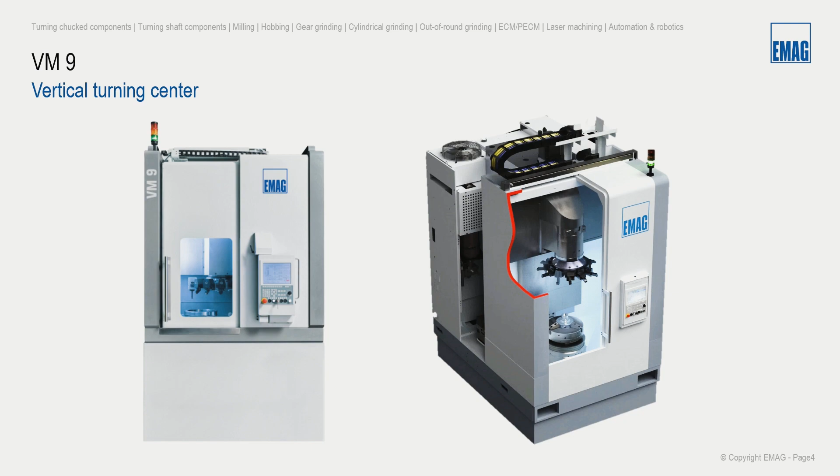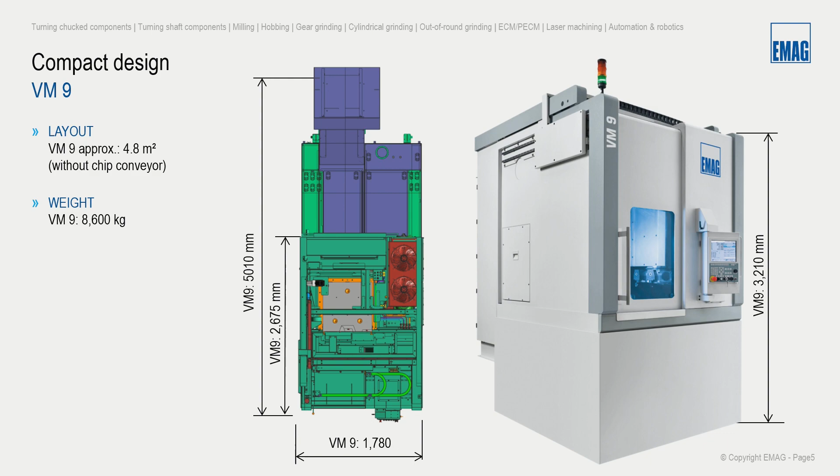The advantage of this machine is a very small footprint. As you can see, we have around 5 square meters of layout footprint, not very wide at 1.8 meters and a height of 3 meters. If you compare this with normal horizontal lathes, which you'd normally use for the production of bigger parts, you can see that we are reducing your floor space with this concept.

I think this is an advantage for all the VL, VT, and VM machines. They all have the same advantages.

Some words on the dimensions. The machine is focused on producing round components, or even more fragile components, up to 450 mm diameter and a component weight of maximum 300 kilograms. If you compare this to the numbers we are used to handling in our vertical VL machines, you can easily see that here we can deal with heavier and bigger-sized components. So this is also one of the reasons why we have this machine.

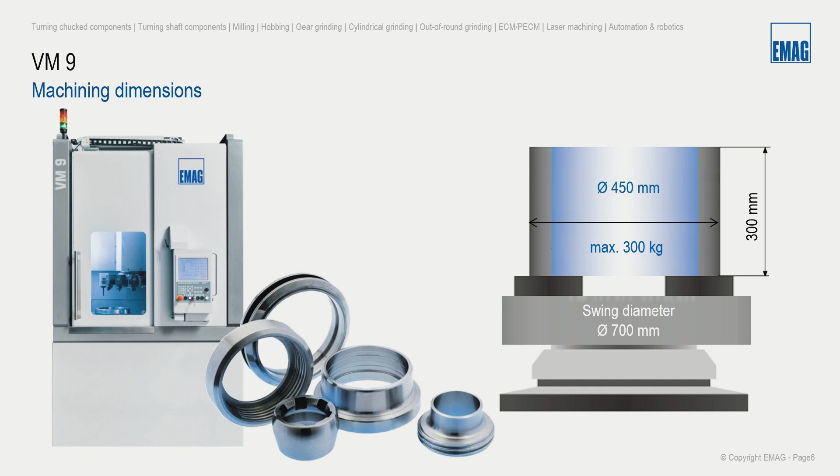Here you can see we are able to machine components up to a height or length of 300 mm, and with the use of a chuck of up to 630 mm diameter, a swing diameter of 700 mm is also possible on this machine.

Oli, you mentioned that we normally deal with the pickup principle, and EMAG is very well known and proven for that. Why is EMAG now changing the concept? Here I will show you some of the goals we had during development.

We developed the machine together with all the other modular standard machines, starting in 2013, 14 - and we developed the entire series from VL2 up to the VM9 machine in one shot. All of these machines are revised twice a year with new components, programming, and everything like that. So the VM is still a part of the modular standard family, also concerning the developments.

What parts had we in mind when we decided to change the concept and go to the bottom-down mounted spindle? We wanted to give you a machine where we can use complex clamping systems, especially for large size, large dimensioned, and heavier parts that are much more sensitive to deformation in clamping.

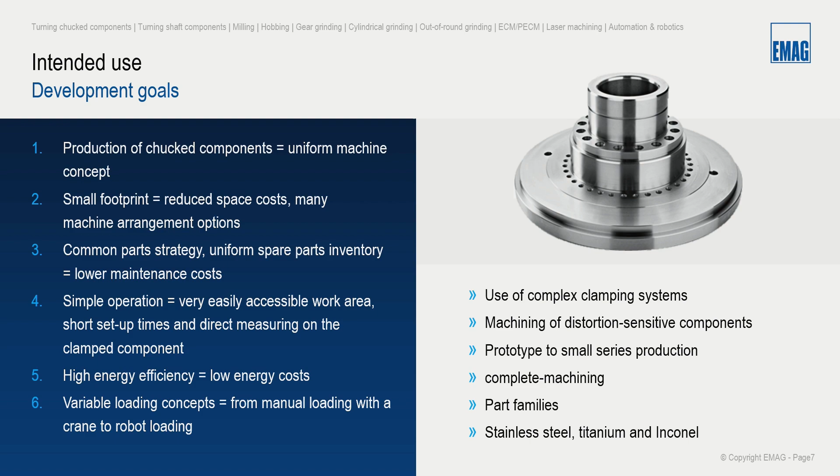Maybe let me interrupt here for the first question. What are the advantages of the bottom spindle compared to the hanging spindle? You mentioned already some advantages. Maybe there are some more you can explain?

I can go more into detail, because more or less I tried to show this on that slide: where is the line between when the use of a hanging spindle or a bottom-down spindle is more useful. It's when the workpiece has a geometry where sensitive deformation is expected when being clamped in the machine, because in the hanging spindle we need more clamping force to put the workpiece on top of the machine.

Then we have this integrated automation in all of our pickup machines, and in this automation system we have only the possibility to load and unload workpieces, or handle workpieces, up to a weight of around 50 kilograms. With a bottom-down spindle, we are limited to about 300 kilograms, but most of the components which have to be machined at our customers are in that range.

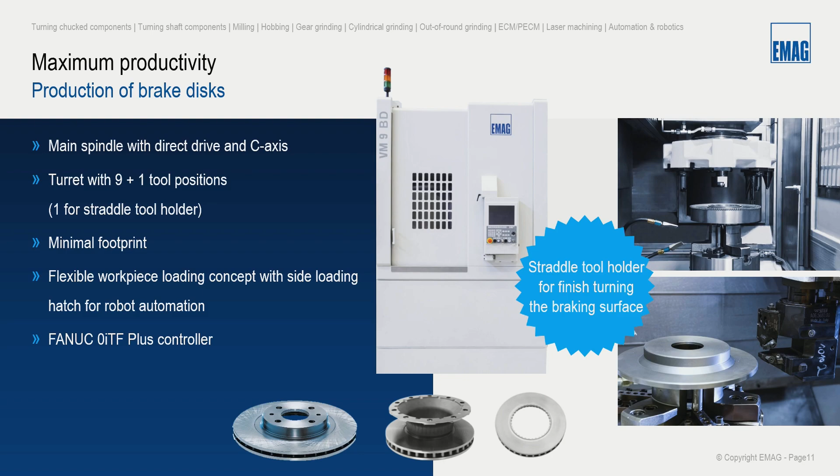There's another question. Why are we promoting here the spindle down concept with robot automation? Does it make more sense to switch to a pickup solution for series production? I think we should also discuss loading and unloading time of different concepts, because that question goes in that direction. Yeah, when we are using pickup machines, we have a loading and unloading time with this internal automation of around 6 to 8 seconds per piece for these large parts. If you compare it to comparable robot automation for brake discs, the robot can be faster. It depends on how many machines should be loaded and unloaded with one robot. If you take one robot to load one machine, depending on the handling speed of the robot, it could be in the dimension of 5 to 6 seconds. So this is comparable. It's comparable, yes.

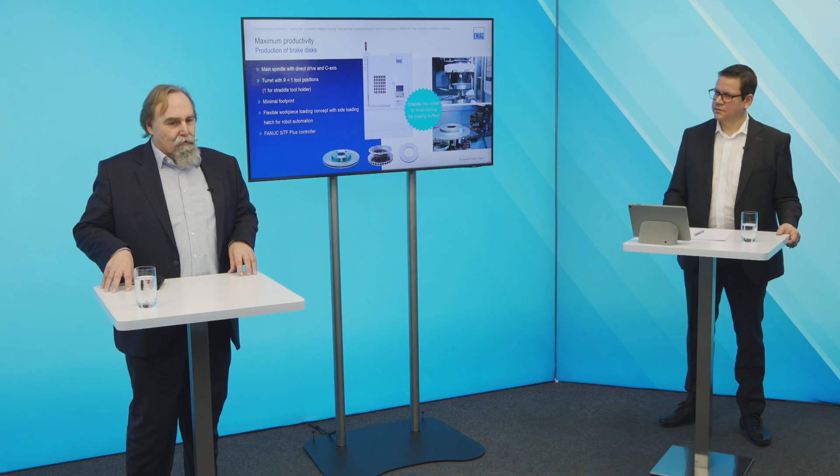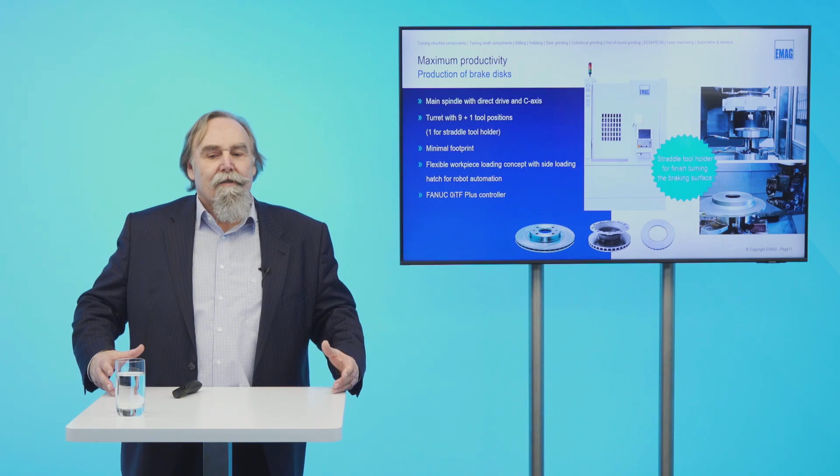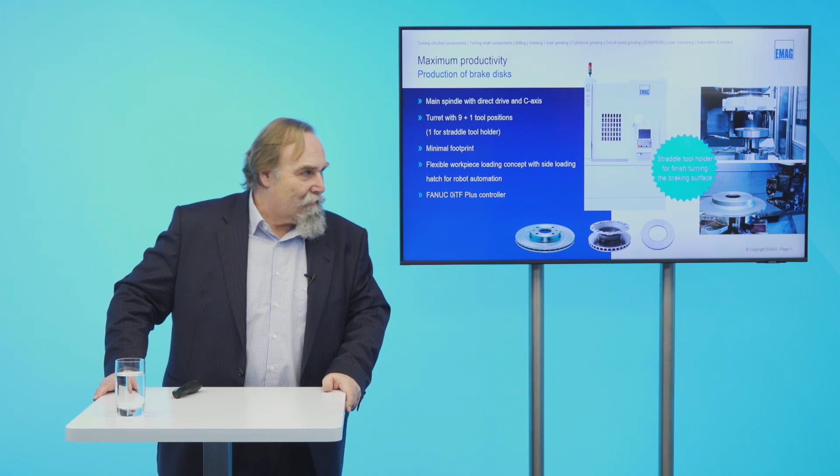When loading and unloading, you also have the influence of the clamping chuck. When you have a 3-jaw chuck, for example, in a pickup machine, you need to take some time to fix the jaws on the component. In that case, the chuck can be closed quicker. But with spindle down, you need a kind of cleaning cycle, you have chips. Yeah, you have the same cleaning cycle with air or with water. Brake discs normally will be machined dry, so dry cutting. Then we are using air to clean up the surface of the chuck. In the hanging spindle, we also do that with air. The chips are falling down quicker and easier from the pickup spindle than from a spindle-down machine. So this is one of the differences. Okay.

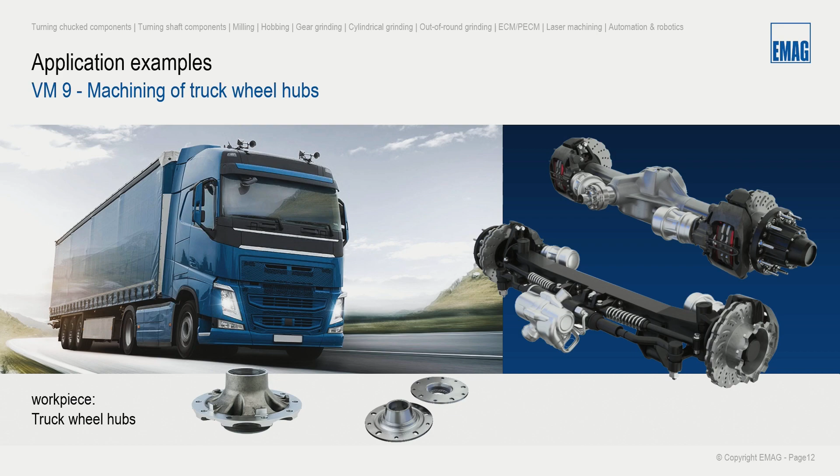So hubs I already mentioned, also for other types of machines. Then this gives a small introduction on an axle of a truck. So here you can find the brake disc, you can find the hub, you can find also a brake drum, which is also an interesting component that can be machined on the VM9.

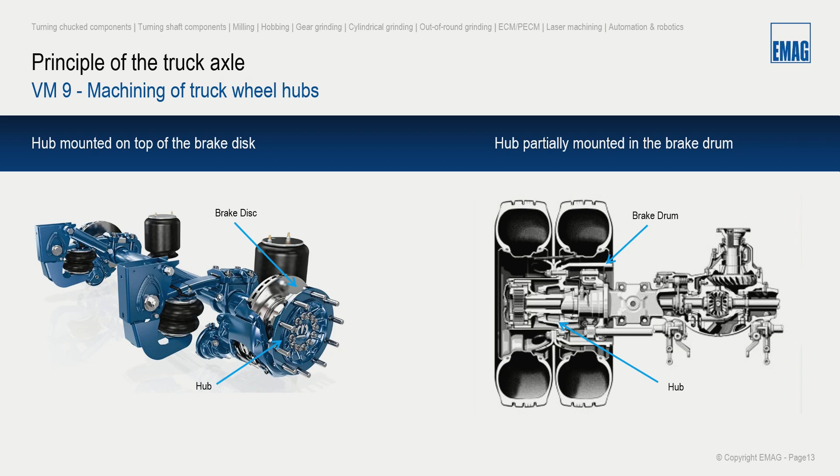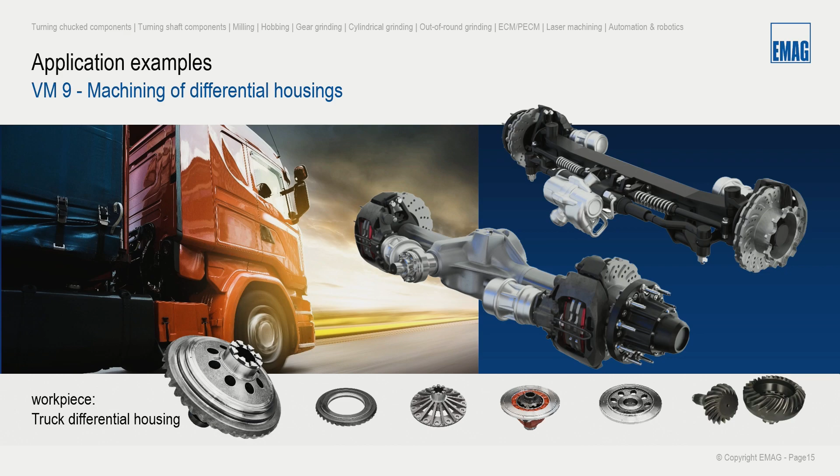And the third big volume component which we had in mind when developing the VM9 is a differential housing of trucks. Because differential housing production is made for passenger cars in the pickup machines very effectively. But here we are talking about dimensions of up to maximum 200 millimeters of the cage.

In the truck business, we have more up till, let's say, 300 or even 400 in the cage on the big machines. And also with heavy weights, we are talking about weights of around, let's say, 45, 50 kilograms. And this is not very effective to be handled in a pickup machine. Okay. We have solutions for this in the VSC world with our customized machines, but not with a serial standard machine. This is only possible here with the VM9. Okay.

Nice component. In these big dimensions, you can find the split differential housing with cover, an end cover with a split housing. And then also the other components forming the differential drive: the pinion gear and all the other gears around. Maybe we can add here, we also have laser welding solutions for differential housing and ring gear. These are the ELC 600 machines from EMAG Laser Tech.

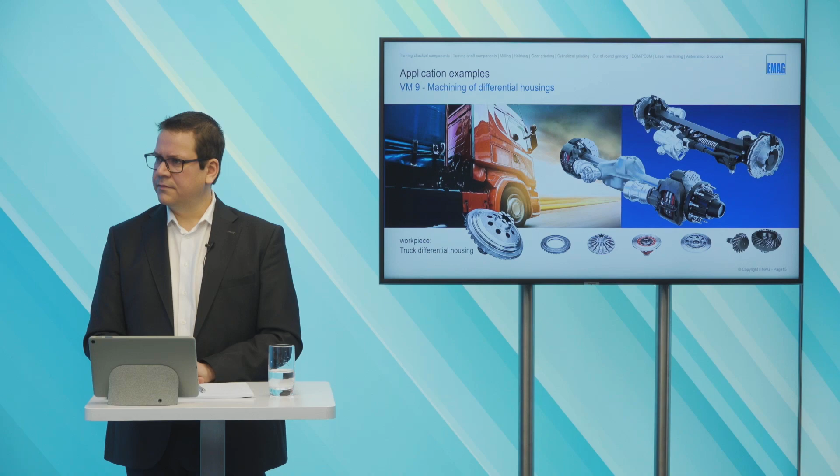Also, we have gear cutting solutions in-house for ring gears, for gear shaping and also gear grinding. Gear shaping, gear grinding, and also gear hobbing. Yeah, with our daughter company, EMAG SU. So the entire process chain can be from raw to finish. From raw to finish, yes.

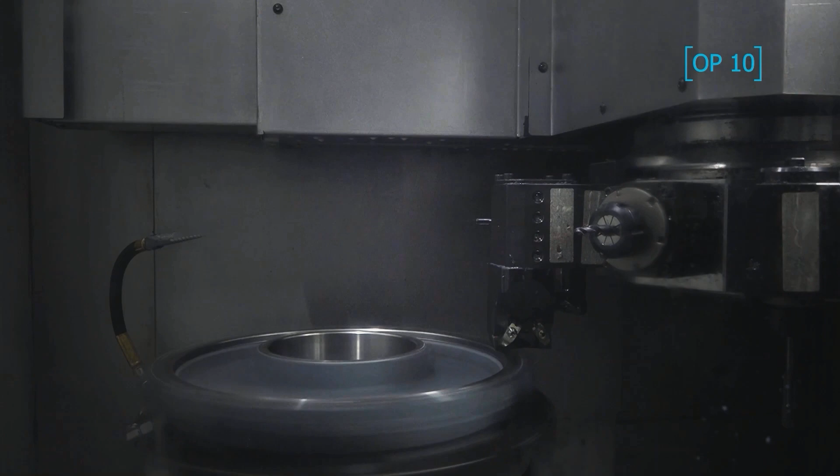So, just to give an impression of how a component will be machined in the VM9, here a short, quick video without any chips falling down. Maybe we have to say this is not the original length. Normally this video runs around 10 minutes, so it's a little bit too long for our show today. So we shortened it to give you the overview of what we are doing in Op 10 and Op 20. So we have 2 operations clamping on this cover workpiece.

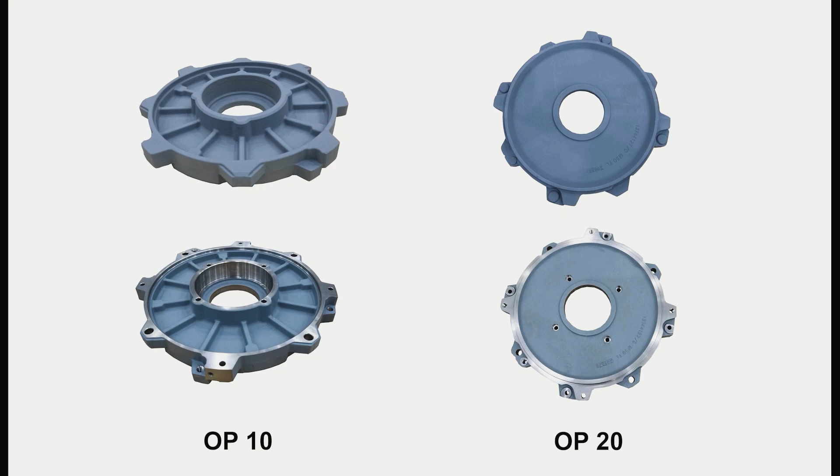We have the turning operation of the face and on the inner bore diameter, then we have some bores in OP10, axial and radial. In operation 20, we are doing some turning on the outer diameter. And here we have also a milling operation on these contours, and then some boring operations as well. And here the overview, 2 operations on 2 machines, manually loaded at one of our customers in that configuration. Manually loaded, for this sample we already saw.

On the left side I have a picture where you can easily see how ergonomic it is for the operator to load such a workpiece manually. Yeah, the spindle is really near the door. Yeah, it's really near, and the height is nearly 1 meter, 1040 millimeters. So it's very ergonomic for the operator to get access to the working area, especially to the chuck. He can get access via the front door.

This could be equipped with an automatic open and close mechanism. In the basic machine, it's only manual to open and to close. So we would recommend this for the machining of parts in batches of 1 to, let's say, 20 workpieces, if the weight of the workpiece enables the operator to do it manually. He could even get help from a manual crane or something like that.

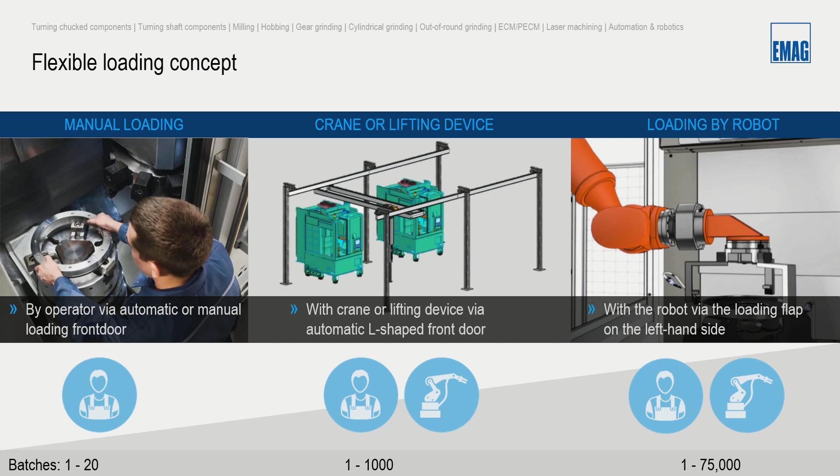Okay. Another question: what should be the ratio of turning to milling to get the most out of the machine? I think this is related to the video we showed, where there were a lot of milling and drilling operations. So the ratio should be 70 to 30%: 70% turning operations, 30% milling and boring operations.

If more is needed in boring or threading operations, we would recommend splitting the machines: a turning machine and then a machining center for these other operations. Okay. But 70 to 30 roundabout would be fine.

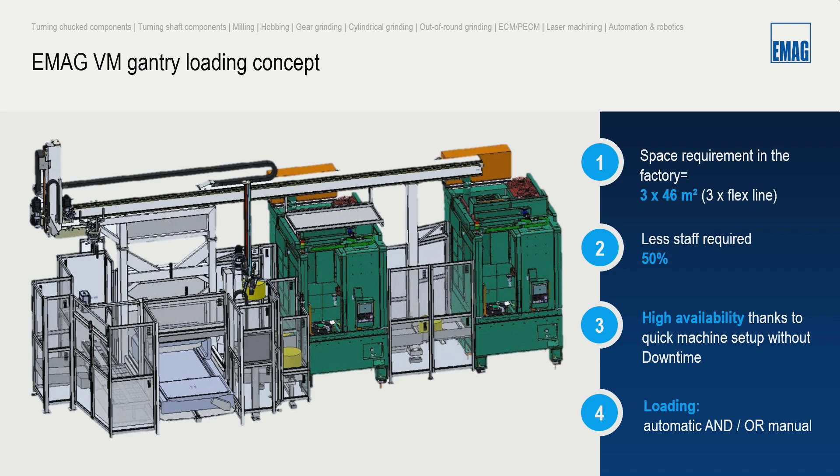Here a view on the footprint of such a solution: OP10, OP20 machine, VM9 with a portal loading system. If you compare this with a horizontal machine solution, with 2 horizontal machines, you need much more floor space. If you're using a horizontal machine with counter spindle, it could be reduced, but a system as compact as one consisting of 2 VM machines could not be realized from our point of view.

This is a pretty nice configuration. One robot is loading and unloading components into 3 VM9 machines. We have a centralized raw part loading conveyor and an unloading conveyor for the finished parts, and the robot is doing the handling in between the machines. It will get access to each machine through a second automatic door on, in that case, the left side of the machine. So the machine is very well accessible, not only from the front side, but also from the left side.

And here you can see very well that this machine concept is so open that we can position our chip conveyors the way it's needed, with the outlet on the left side, right side, back side, everything is possible. Yeah, I think even with the robot automation, the accessibility is really good on that line. You always have access to the front door, to the control, to hydraulics, electronics.

Really often you see robot automation systems in the field where accessibility is a problem, because they are using the front door and it's not possible for the operator to have access, especially when the robot opens the door. Yes. In this configuration with our machine, the operator can, if required, get access through the front door into the machine. In that case, the side door is closed and everything is safe. Okay, that's good. According to CE regulations, that's really important.

So some words on the machine structure. The machine structure is comparable to all of the modular standard machines. The central point of all of our modular standard machines is our column made of our MINERALIT material. So we have this column cast out of MINERALIT. We invented that material many years ago, and we are using it for all of the EMAG machine bed frames.

This has good damping properties and good thermostability, and this ensures higher surface quality on the workpiece as well as much longer tool life, because when better damped, the tool is not consumed so fast. Then you can see here we have these linear guideways, also from sub-suppliers, well-known German brands.

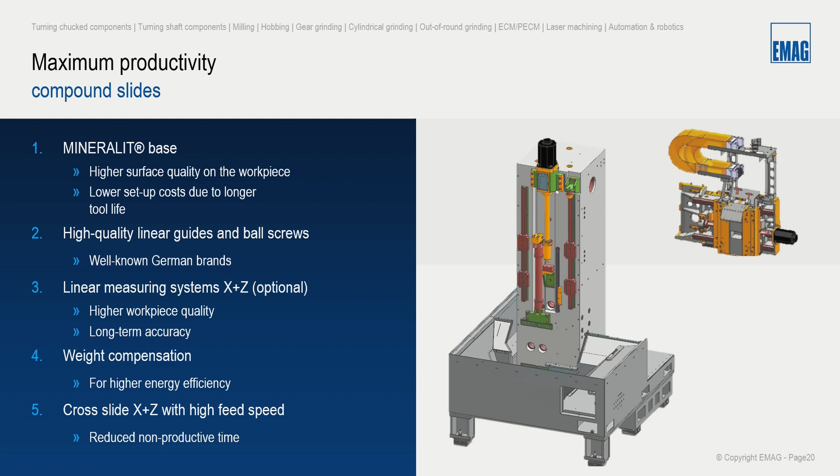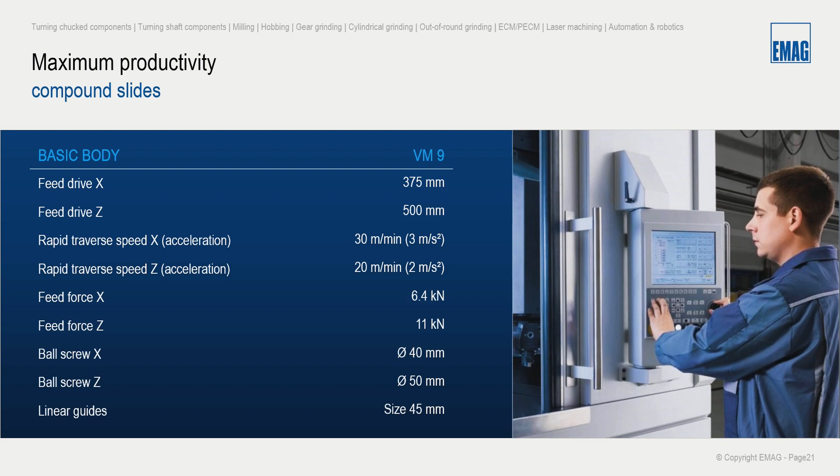Some numbers on the feeds and speeds. We are using big dimensioned ball screws and linear guides.

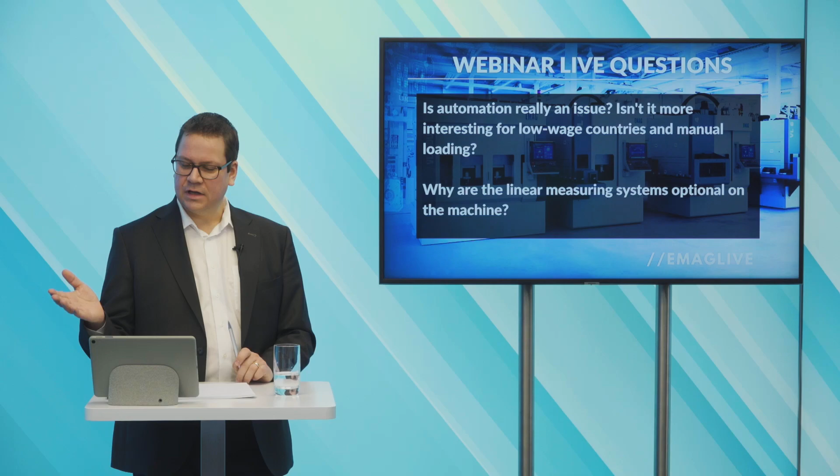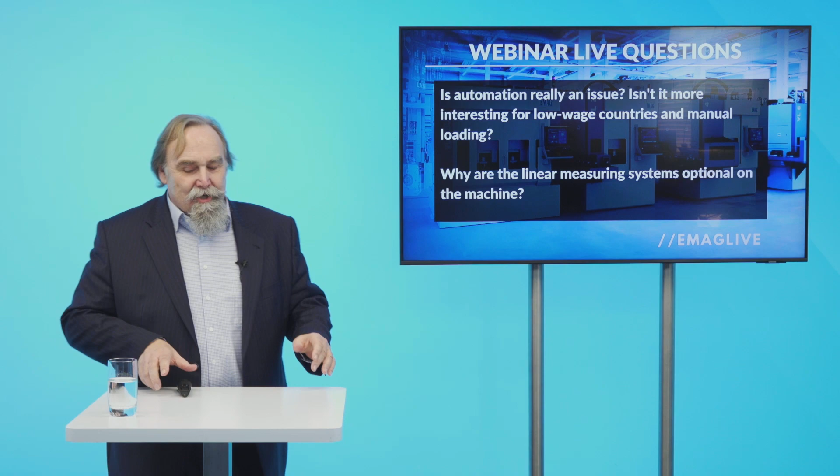One more question, or two more questions. Is automation really an issue? Isn't it more interesting for low-wage countries and manual loading? I think we have to discuss a little bit the difference between Asia and Europe and Americas. Yeah, especially in Asia, where, let's say, mainly our competition is located, we are selling these machines, let's say, 99% manually loaded.

Because in some low-wage countries in Asia, a manual loading and unloading of a machine is okay. Also, if you see that one operator is maintaining one machine. So this is the most economic system for them.

In Europe and in America, it's the other way around. Most of these machines we already sold are equipped with automation. Not only coming from EMAG, the automation, also we have a lot of customers who add their own systems or their own robot systems on this machine. But this is a matter of the wage. And I think you already answered this question. Why is the linear measuring system an option on the machine?

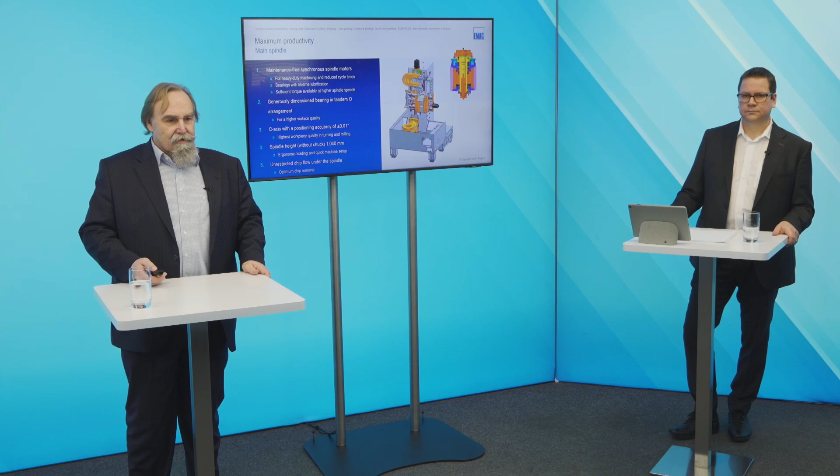Some words on the spindle. We are using a maintenance-free synchronous spindle motor. By the way, just a word: nearly 85% of all the components our EMAG machines consist of are homemade by EMAG in our production facilities.

So, which means spindle, turret, bed frame casting, sheet metal production, all of this will be done by our colleagues in our production facilities. So with this we can guarantee the quality, not only of the components, but the quality of our components will guarantee the quality you will have on your workpiece after that.

So I already mentioned that with that we have ergonomic loading and unloading and a quick machine setup. And just a word on the chip flow. You see that I have written here unrestricted chip flow under the spindle. Nearly unrestricted. The advantage of a pickup machine, where we come from at EMAG, is that the chip flow is unrestricted.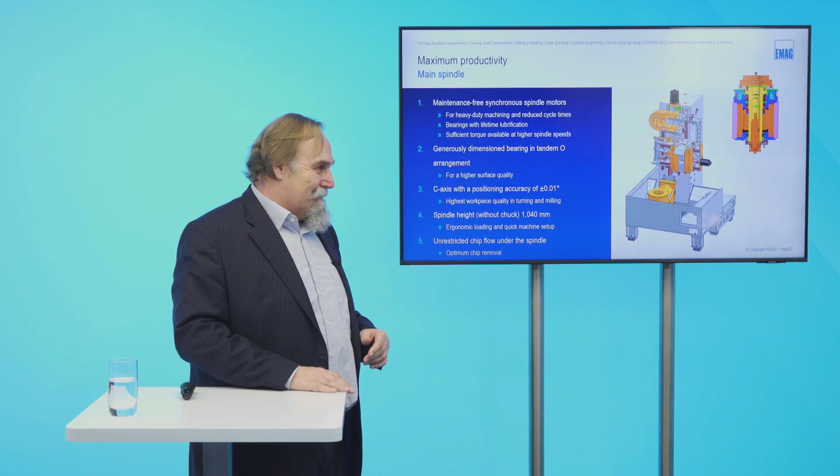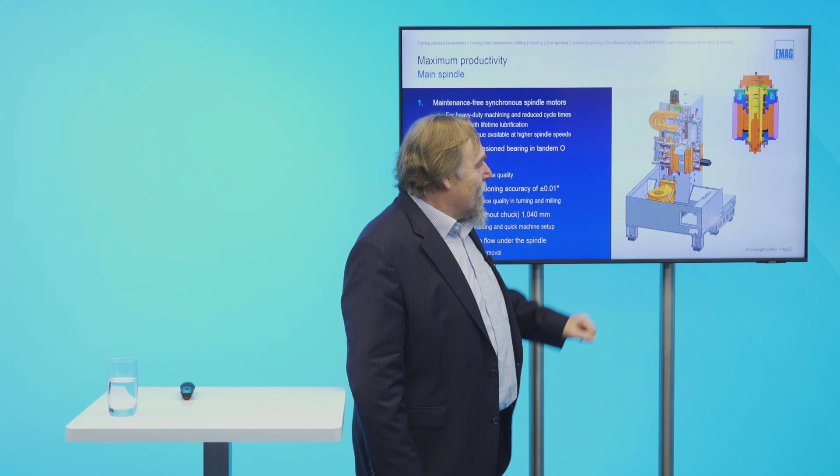Absolutely. When we have now the spindle mounted on the bottom of the machine, okay, it's in the way of the chip flow, but we had a solution for this. You see that we have here some kind of roof-type sheet metal, so if the chips are falling on the sheet metal, they will be directly led into the vertical flow around the spindle. So we take care that the chips will also have good flow into the chip conveyor on the bottom.

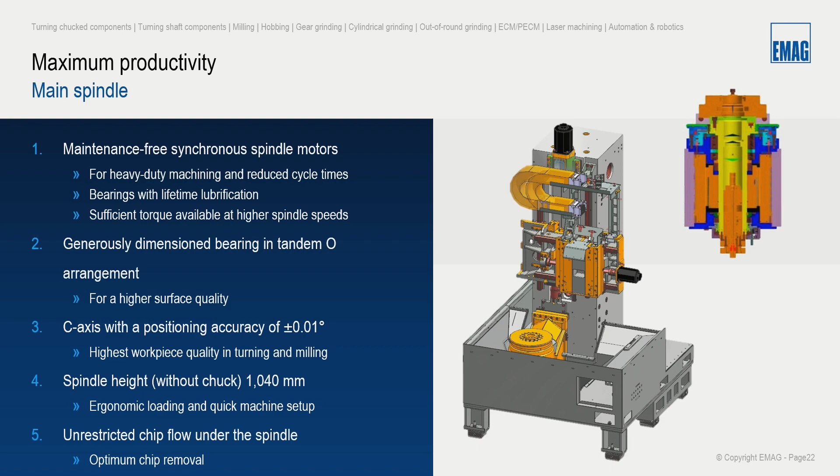So we equip the machine with everything to guarantee the most possible unrestricted chip flow. That's a good sentence.

So just some numbers on the main spindle. As you can see here, we are using a 38 kilowatt spindle with a torque of 500, max 650 Newton meters. Full power of the spindle is from 720 RPM on, and we have a maximum spindle speed of 3000 RPM.

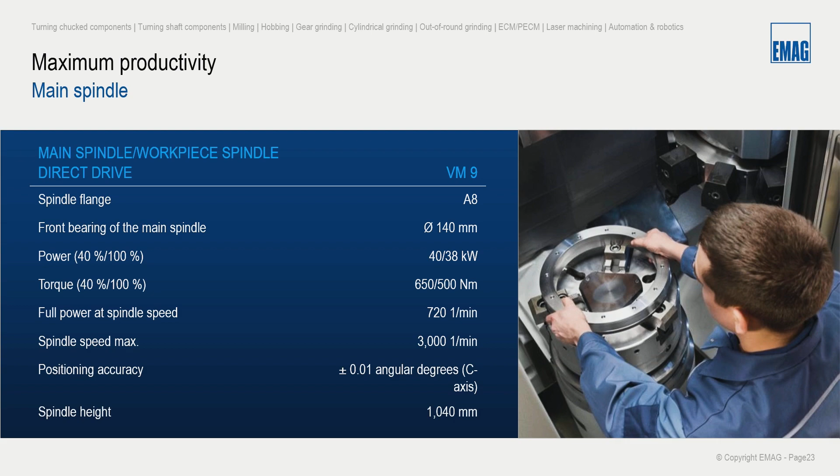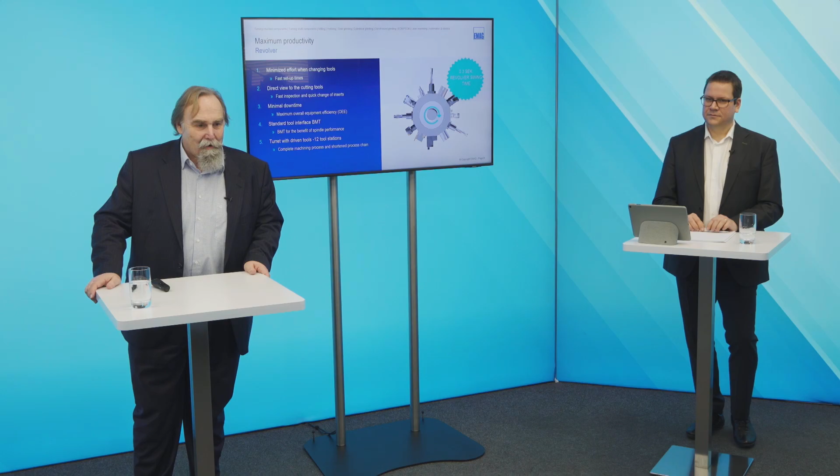One short question. What is the delivery time of the machine? Seven months, approximately. Thank you. Because we are producing 85% of all the components, we have this in our hand. It's depending on our production, actually, the requirements. But roundabout seven months.

So I already mentioned our turret. This is the well-proven EMAG turret we are using in nearly all of our EMAG machines. We have produced roundabout 15,000 turrets over the years in that concept.

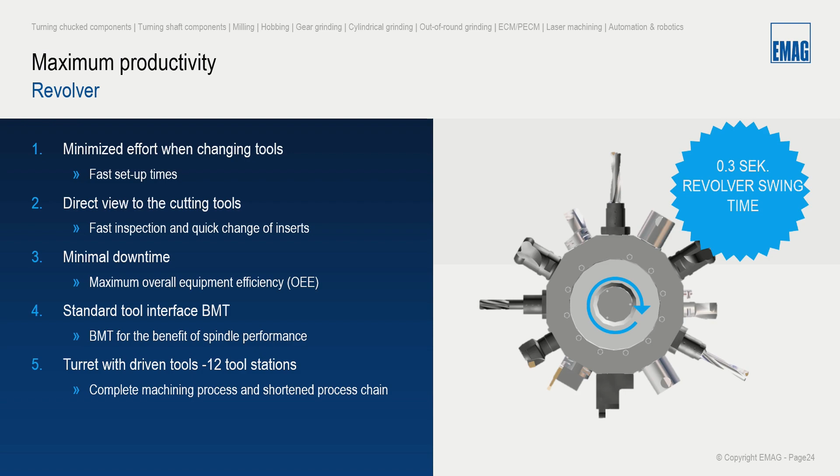And we have here added a second type of drive. The normal concept of the drive of the tool in our turret is the conventional way, with a motor, then with a gear, bringing the turning onto the tool. We have a second possibility if we need more RPMs and even more torque. Then we can put the drive inside the turret disc. We call this HP turret, high performance turret.

Here are some numbers. With this kind of turret, it will be possible to use a torque of maximum 56 Newton meters and a power of up to 17.5 kilowatts in 10% ED, but in 100% we are still working with 33 Newton meters and 10 kilowatts. It's a good number. Maximum speed on the tool is 10,000 RPM, and full power from 3,000 RPM on.

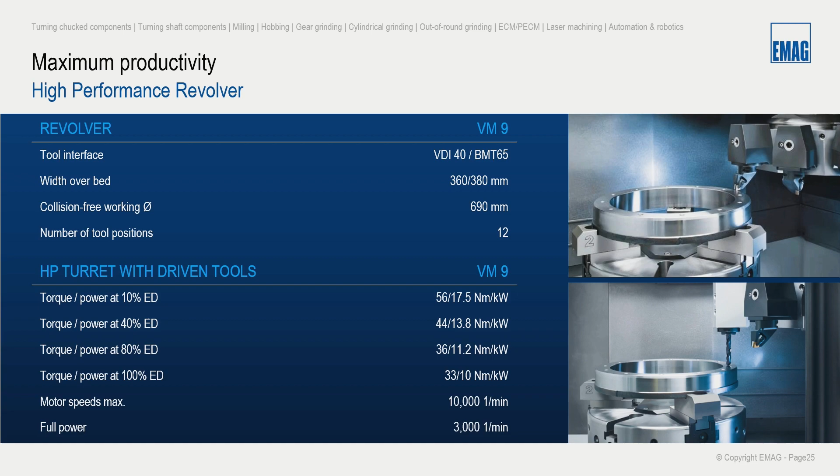Okay, just let me interrupt here. We got another question: I know this type of machine mainly from Asian machine tool builders. What advantages do you offer over these manufacturers? To say it that way, we know that we have a lot of competition from Asia. They are producing good machines in the market.

But if you compare the ratio of power on the spindle, power on the workpiece, stability of bed frames and things like that, our price ratio is in the end economic. Okay, so we do have a good price-performance ratio. Yes, this is what we can say to these machines, and it's not always 100% comparable because the performance of the machines is different.

It's always a matter of what is your production facility philosophy. If you have to do only the green turning, the pre-turning of components and things like that, and it's okay for you to have a spindle with 18 kilowatts or such, then you can also use a machine which is not of that rigidity and not of this power spindle that we have.

Just one word, I already mentioned that. We are very proud to have an additional patent on the VM9 machine option. We have designed a special measuring gauge, in this case a radio-controlled measuring gauge. For sure, we don't produce the measuring gauge, we are supplying that. But the special and patented thing is the cover.

If you are not in the measuring process, the measuring gauge probes will be covered with this sheet metal cover. This will be opened and closed via the drive of the turret. So it's like a driven tool, and it can be switched on and off like a driven tool. This gives the movement to shut and open the cover for the measuring gauge to protect it against pollution, chips, abrasion and even damage.

In that case, it's mandatory to equip the machine with the linear scales, because the linear scale gives the repeatability and the accuracy of your measuring process.

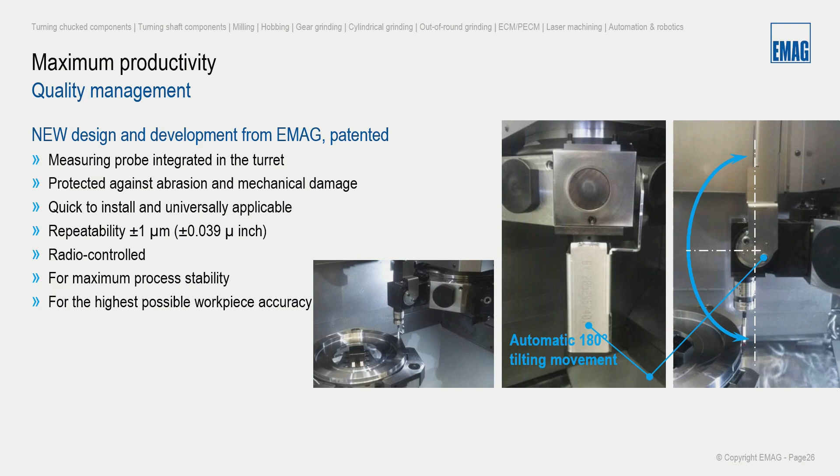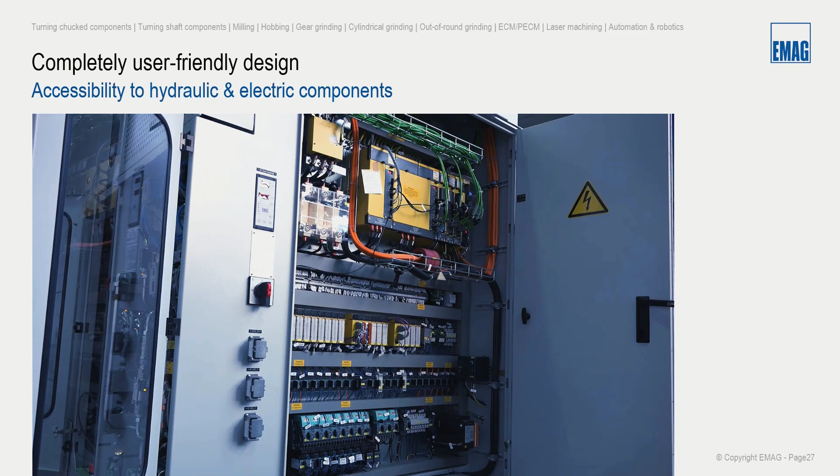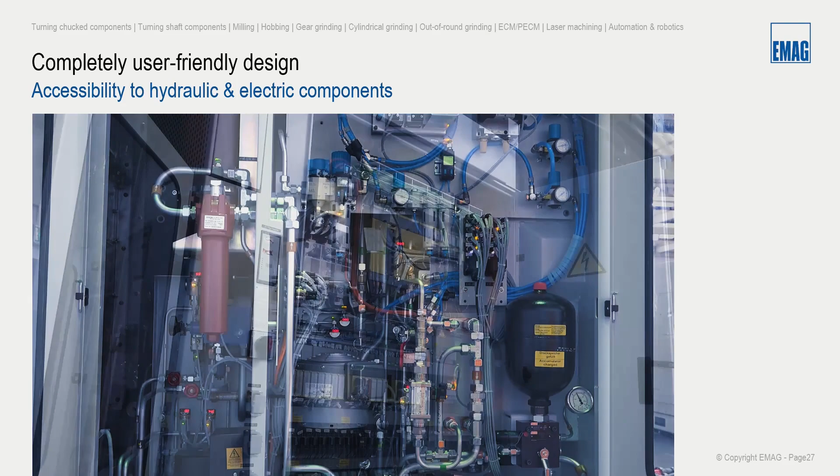Here's a quick view inside our machining room, where our components are. Here the electrical cabinet, you see the FANUC components. The machine is equipped with FANUC control and with all drives and all the needed electrical components from FANUC. Here a view inside the hydraulic and pneumatic area. You can see you have easy access. Everything is structured and easy to maintain, even for the service department.

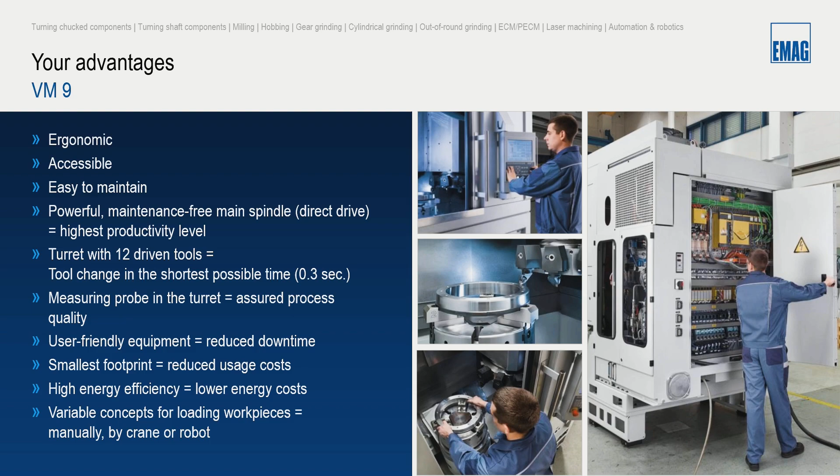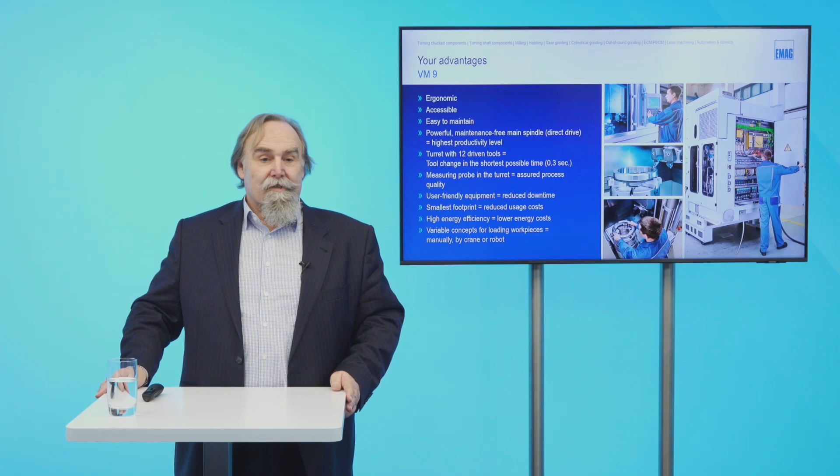So this brings me to the summary of all the advantages you can get with our VM9 modular standard machine. First, the ergonomic design gives the operator good accessibility to the working area with his workpiece. It's easy to maintain. Then we have this powerful, maintenance-free, directly driven main spindle, with a view to the highest productivity and quality.

Then we have this driven tool turret with 12 driven tools and a really short tool-to-tool changing time of 0.3 seconds. We can have this measuring probe I already showed to assure the process quality. The complete machine is user-friendly, you can see it in the picture on the right side. Easy for the service guy to access all the components. We have a small footprint, and a variable concept for loading and unloading, from manual crane loading up to robot automatic loading.